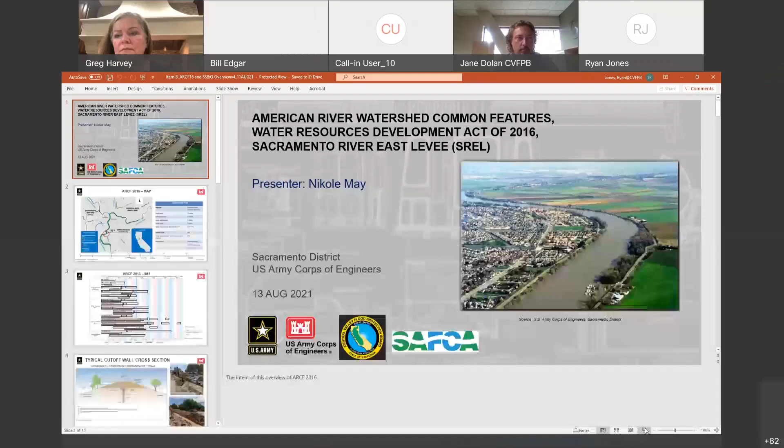Good morning, President Edgar and members of the board. My name is Nikole May. I am a project manager with the Army Corps of Engineers on the American River Common Features 2016 project. Good morning. My area of focus is seepage, stability and overtopping.

Before I move off this slide, just to echo Greg's comments, it really does take a team, and I want to compliment the partnership that has happened between the Corps, yourselves, the Department of Water Resources, and the Sacramento Area Flood Control Agency. We have leveraged everyone's efforts on this massive project to get everything done we've got done so far, and we'll continue to do so, and just appreciate the support of this very important flood risk reduction project.

I'm going to provide a very high-level overview of the overall project, and then a more focused overview of the seepage, stability and overtopping features. So the next slide is a very big picture overview of the project.

What I really want to say here is that the purpose of this project is to address the flood risk associated with the confluence of the Lower American River and the Sacramento River. Both of these rivers have very large watersheds and very high potential runoff, which has overwhelmed the existing system in the past. It's created an unacceptably high level of risk of flooding for approximately 500,000 people, approximately 125,000 structures, and approximately $62 billion worth of damages.

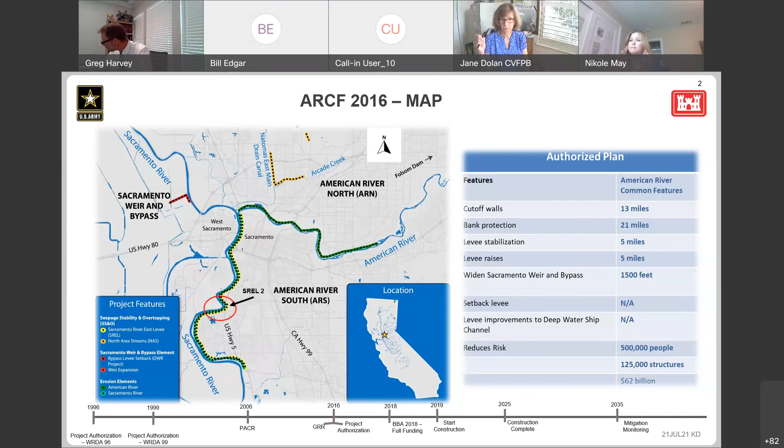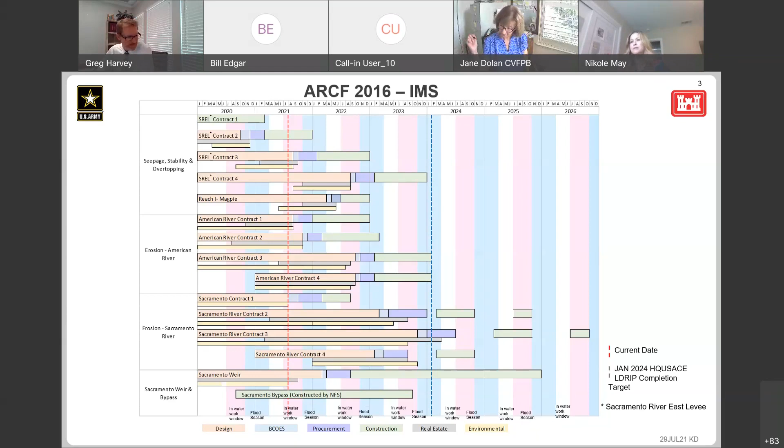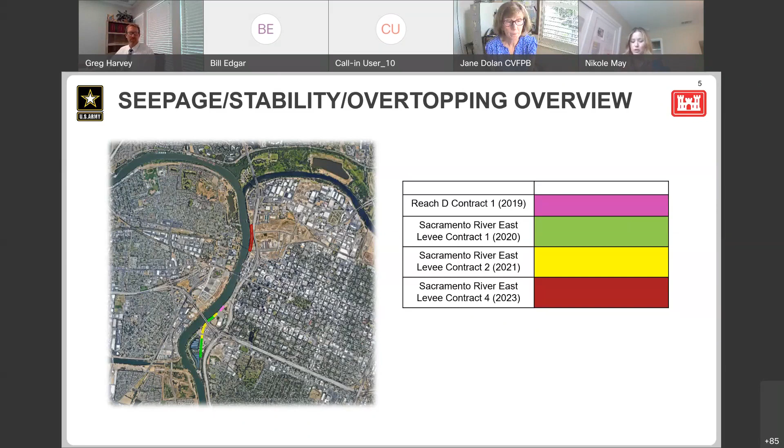The next slide shows approximately 1 mile of improvements, moving a little bit south or downstream. You can see the little pocket there at the bottom of the graphic. There's approximately two-thirds of the mile complete, which you can see in green, and also this year's construction in yellow is already complete and the levee is rebuilt. There's approximately one-third of a mile remaining in 2023, and that will be a cutoff wall as well. The next slide shows you the footprint for the big pocket.

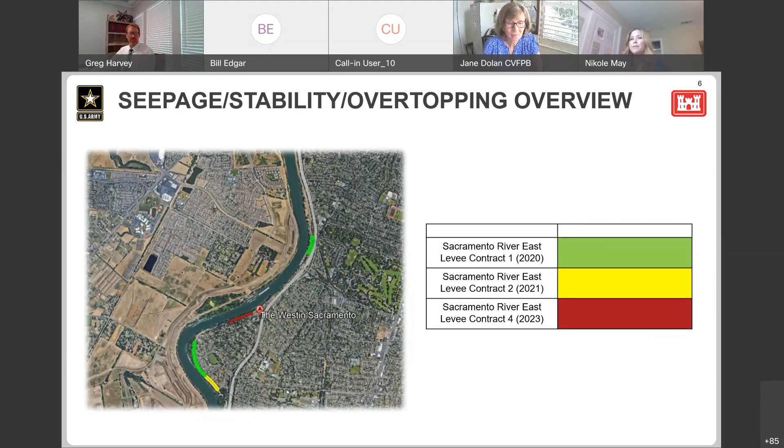The next slide shows just south of the town of Freeport. It includes approximately 1,800 feet of levee raise, approximately 750 feet of cutoff wall, and then we'll be excavating and backfilling with impervious material 2 utility windows that have created gaps. That will all happen in 2023.

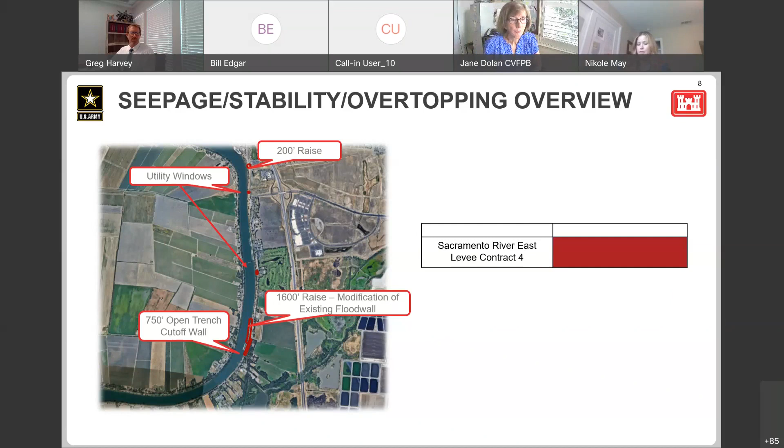And the last slide for this section is Magpie Creek. You can tell the location in the top left corner. You can see the confluence of the rivers down there at the bottom left of that image, and then a blow-up image of what is actually happening here. Just to highlight the major features, there's 2,100 feet of levee raise, approximately 1,000 feet of new levee construction, and a floodgate that will be across Raley Boulevard.

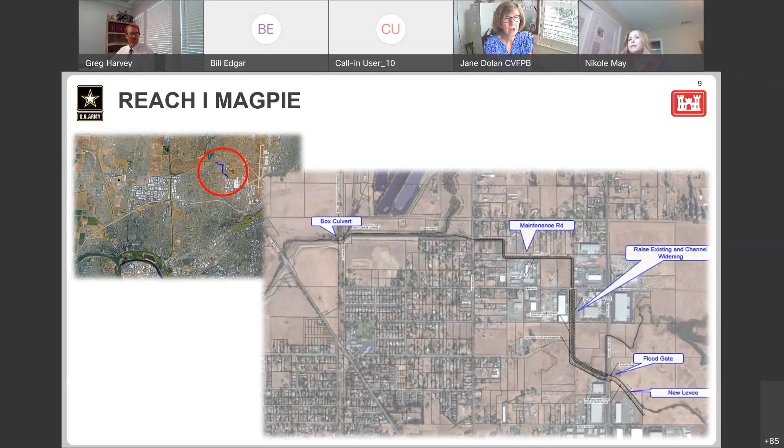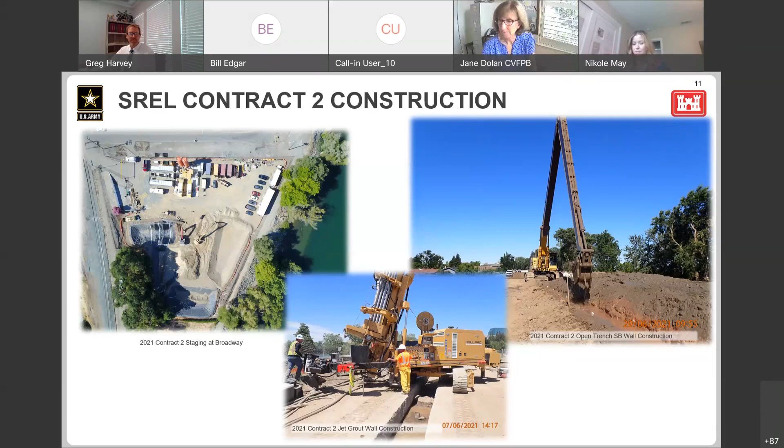So it is quite the piece of equipment. The next slide goes over the impacts.

With major construction, there's inevitably impacts. I'm going to highlight some of those: truck traffic and dirt movement. We have to degrade the portion of the levee, and then rebuild it at the end. There's a lot of truck traffic associated with that work effort, which also causes a lot of dust. It can be at peak times up to 120 trucks per day. That typically happens in the months of March and April for the degrade, and rebuild in August and September.

There's also a lot of vibration and noise associated with these massive pieces of construction equipment. They are very close to residential neighborhoods, and they are reaching depths of 60 to 145 feet. You never know what you're going to hit underground. While we're doing that major construction, it does cause some vibration and noise that is felt and heard by the public.

There are also some recreational impacts. Biking, the levee trails, the levee crest has to be closed to the public during degrade just for safety purposes. Boating and fishing, we've had some impacts at Garcia Bend as well as Miller Park. We had 1 year where the boat ramp at Garcia Bend was closed for the entire season. That was 2020. For 2021 and 2022, we're only closing it periodically when we have those high truck traffic times for the safety of the public.

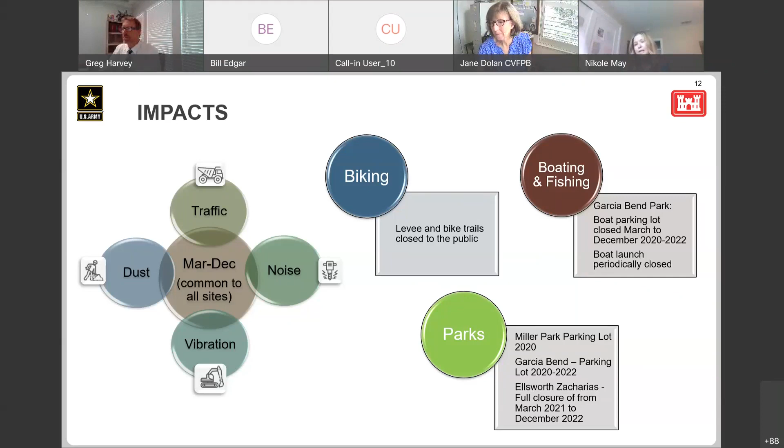And then we have water and air quality monitoring that is required throughout the project. Next slide.

Beach Stone Lakes mitigation is approximately 24.2 acres. It's anticipated to mitigate for all 3 Sacramento River East Levee seepage and stability contracts and a portion, if not all, of contract 4. It's completed and it is flourishing. I went out there a couple of months ago and saw it, and it looks much more full than these pictures represent from last spring.

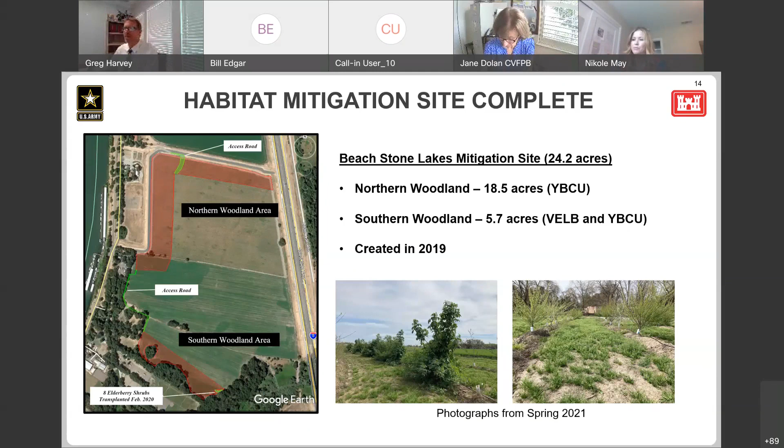Typically, the message to the team is, if there's anything that the public can see, touch, feel, hear, we want them to be able to go to the website and be educated and informed of what is happening before they see, touch, feel, or hear it. So that's been our approach on this project, and really that's all I have, subject to your questions.

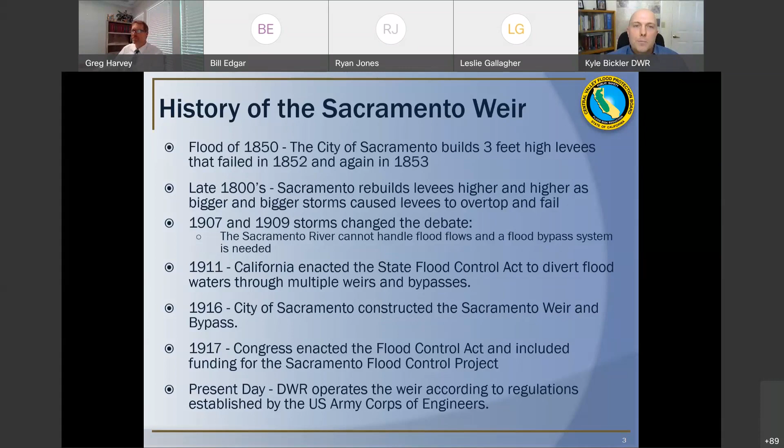Next slide, please. Before handing off the presentation to the Corps and HDR, we want to remind the board of the upcoming action scheduled for August 27th, where the board will be asked to certify the final supplemental EIS-EIR, adopt the statement of findings, the statement of overriding considerations, and the MMRP, and approve the Sacramento Weir project and fish passage. Now I'd like to introduce Sean McNeil with the Army Corps. Ryan, would you please load Sean's presentation? Thank you.

Good morning everyone, this is Sean McNeil. I'm the Senior Project Manager with the Corps of Engineers for the Sacramento Weir Widening Project. It's a pleasure to speak to you today on behalf of the team. We're honored and privileged to work on this project. We're a very diverse design team with over 100 people on the design and review of this. We work with the Central Valley Flood Protection Board, DWR, and SAFCA very closely to execute this project.

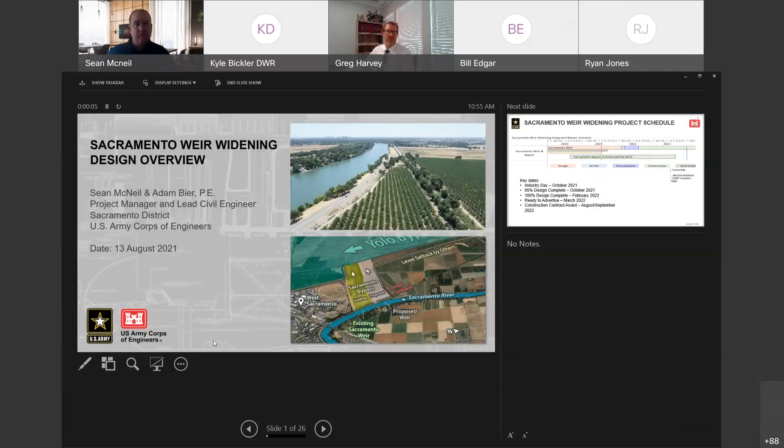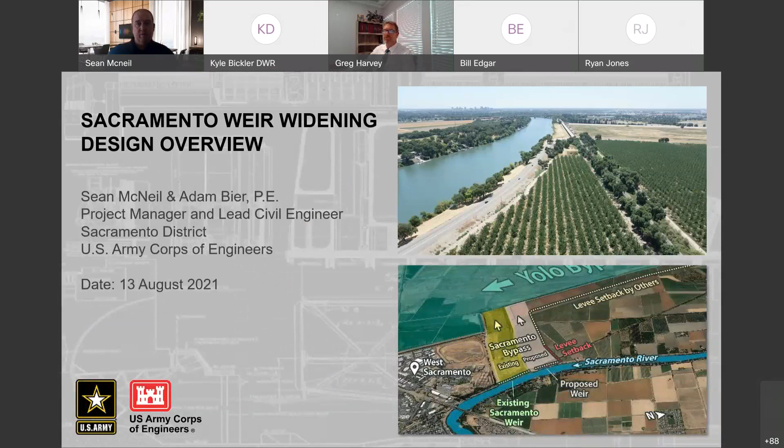We are on a quick pace because we were fully funded and it's an emergency project. Once we get to the next slide, I'll show you the schedule that we're currently on. Barring any unforeseen conditions, next slide Ryan, we plan to be in construction, awarding our construction contract in August, September.

So you can see the key dates below. We're going to offer an industry day this October that will assist contractors who may bid on this to understand the project so they can plan appropriately for when we put this on the street, on the ready to advertise date around March of 2022. But we'll conclude our design by February of 2022.

Unless there's any questions, I'm going to hand this over to our tech lead to better show you the Sacramento Weir Widening Project. Adam Bier, I'm going to hand it off to you. Thanks.

Thanks, Sean. Good morning, and thank you for the opportunity to provide a briefing on the Sacramento Weir Widening Project today. My name is Adam Bier, and I'm one of the engineering technical leads for the Army Corps of Engineers for this project. Next slide, please.

The Sacramento Weir Widening Project is located along the Sacramento River, just north of the existing Sacramento Weir, which, as Kyle showed earlier, was constructed in 1916. The project will be along the right bank of the Sacramento River, looking downstream, or the western bank of the river. The project site construction access will be from the north, about 8 miles north of the project, near Old River Road and Interstate 5.

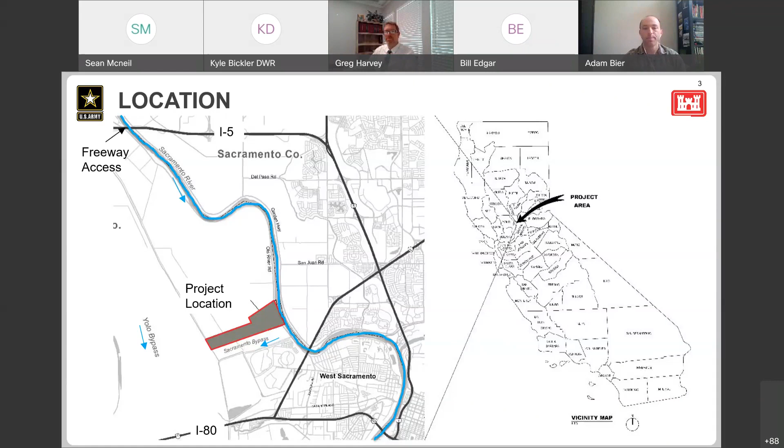And the bypass will be widened approximately 1,500 feet. Next slide, please.

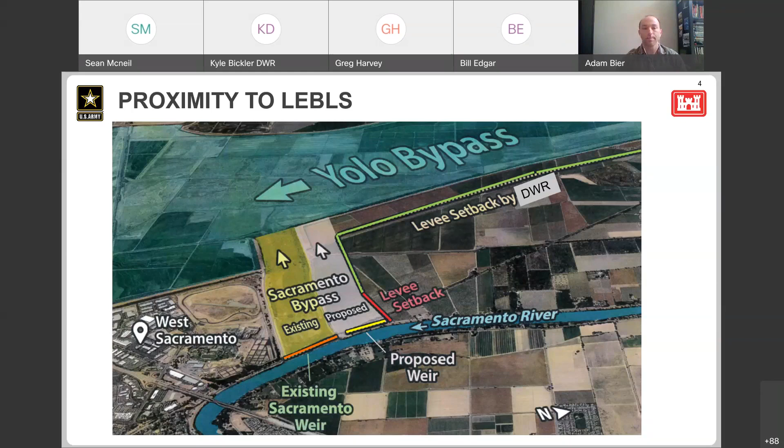This image shows some of the project features, going from the Sacramento River at the bottom of the screen towards the Yolo Bypass at the top. I wanted to highlight some of the project features this morning. The primary flood control feature is the weir. There will be a road bridge for Old River Road that will span the bypass and go over the weir. The road bridge is approximately 1,800 feet long, and the weir is approximately 1,500 feet long.

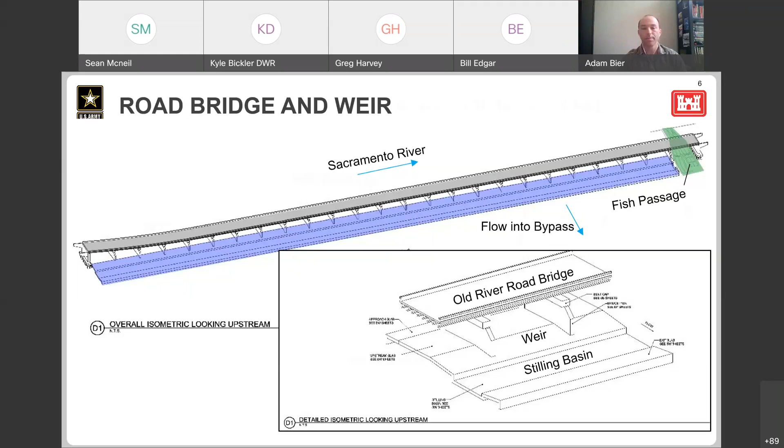One thing I wanted to note is that the project will be maintaining access on Old River Road throughout construction for the project site. As Nicole noted earlier with the seepage and stability project, this project is also anticipated to have heavy truck traffic on Old River Road coming from the north and I-5. The project includes approximately 1 mile of new paved road along County Road 126 and Old River Road, including the new road bridge.

With that, is it time for questions, or do we want to go on to the fish passage first and then come back on questions?

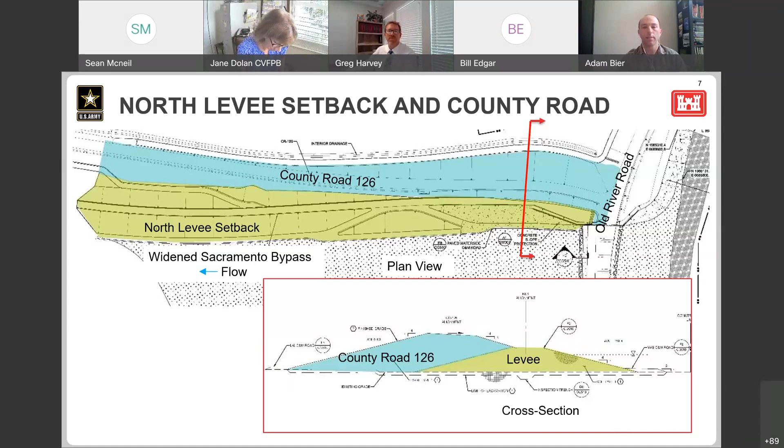All right, well, thank you. And if you have any questions, I can entertain them later. With that, I'll hand it over to Matt Prosif and Gabe Kopp from HDR, who will go over the fish passage feature in detail. Thank you. Thanks, Adam.

Hello, my name is Gabriel Kopp. I'm a senior fisheries biologist with HDR. I wanted to thank President Edgar and members of the board for the opportunity to talk about HDR's role in supporting the Army Corps, DWR, and SAFCA in the Sacramento Weir widening fish passage design project. I'll start with the biology side of things, and then Matt Prosif will present on the structure. Next slide, please.

So we're talking about a floodway project. Why is there fish passage involved in this project? It's a completely fair question.

Previously, with the existing Sacramento weir for the overall flood project, there was stranding that occurred after the floodway of the old Sac weir - not the new one we're building, but the old one. As it began to drain, fish would strand, and that would happen fairly regularly. Biologists would go out as the water receded and pick up as many fish as they could, but obviously there was a great deal of stress, and there was also loss. We had notable mortality events sufficient enough that the National Marine Fisheries Service, NMFS, stated in their regulatory document.

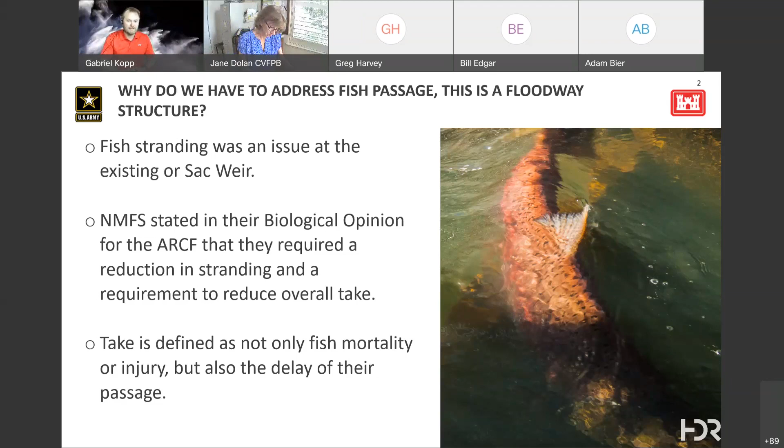The biological opinion for ARCF stated that they would require a reduction in the amount of stranding that occurred and to reduce overall take. Take is defined as not only fish mortality, but injury and even delaying their ability to pass through the waters of the river during these flood conditions. Next slide, please.

So we need these flood projects. Obviously, we have had a history in California when we don't protect our cities, our homes, and our communities, we've seen flooding. Many of us can go back a decade, two decades, or even a hundred years, and look at images of flooding, and really we don't want to repeat those.

So we protect our cities with levees, we straighten the rivers, and in doing so they become less like a natural river. We've learned through time to find that balance better. We can both protect our cities and protect our natural resources, and really restore those riverways into environments that are safer for our cities and safer for our fish, provide them with access and passage, and ensure that we're not having water expand so much that it's creating damage as well. We're finding the balance better.

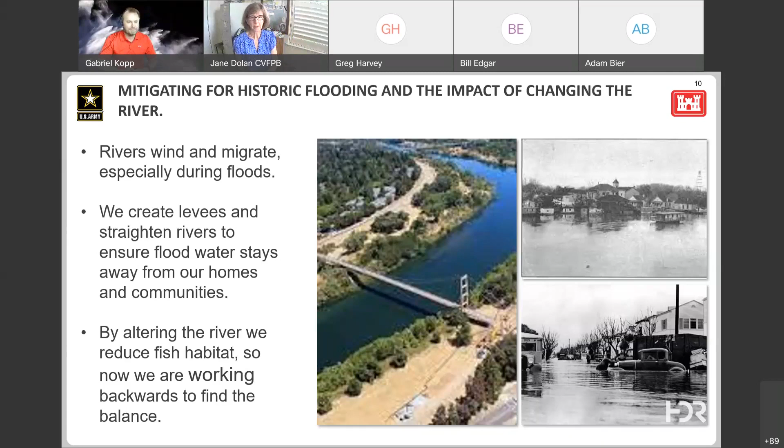So now that we have the idea that we need to have fish passage, and it's part of our floodway project, a regulatory part of our floodway project, what fish are we looking at? Well, the Endangered Species Act drives what fish we are focusing on, because those are fish in fewer numbers. So there are two species currently listed that we're focusing on: specific runs of Chinook salmon, the spring and winter run, and also green sturgeon.

Now, green sturgeon is a very archaic species. It's not evolved very much. You might call it a modern-day dinosaur. It's a fish we don't know as much about as we do, say, a salmon or a steelhead. It's one that you may not even recognize as much. And so there aren't that many projects that actually pass green sturgeon. In fact, there are very few.

To that end, we have really good criteria, state and federally approved criteria, for how we pass salmon and steelhead and other species, but we don't have criteria specific to green sturgeon. Next slide, please. Don't have those guiding documents.

What do we do? Well, we brought in a suite of experts: experts in the biology of sturgeon, experts in fisheries passage, our regulatory experts, and our client experts, so that we could discuss in a collaborative fashion. It took us about 35 formal meetings, among many other breakout sessions, including participants from the Army Corps, the Department of Water Resources, SAFCA, NMFS, the CVFPB, the California Department of Fish and Wildlife, and many others, to establish an agreed-upon approach for how we were going to create a structure that provides the best potential environment, based on what we know, to pass both salmon and green sturgeon.

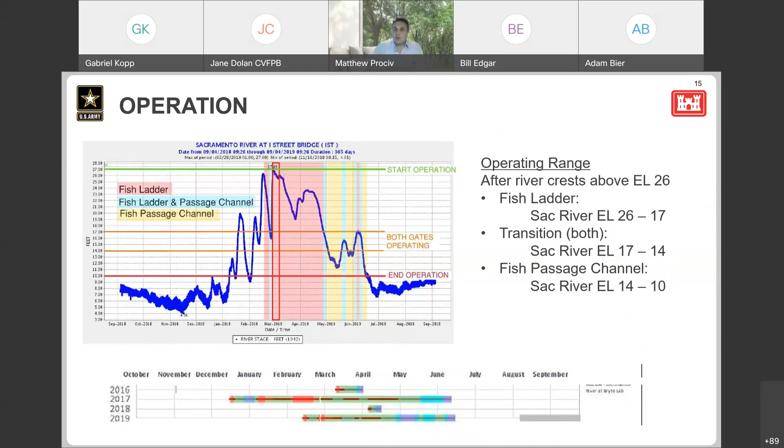As I mentioned, operation of the fish passage facilities will begin after the river crests above elevation 26. Once the water in the river recedes down to elevation 26, the widened weir stops spilling water. The bypass is still full of water and is starting to drain out into the Yolo. That's when we open our operation gate, our flow control gate for the fish ladder, and begin operating the fish ladder. We'll continue to operate that down to elevation 17.

Now, as you can see, the river elevation doesn't follow a regular linear path. Occasionally, following a storm event, we'll get subsequent storms that provide more water to the river. As time passes, we get another storm event and the river level might rise again before falling. We might get several of those peak smaller storm events or releases of water that cause our fish passage to potentially move back and forth between different modes of operation.

So you can see, after operating the fish ladder, as the water falls in the river, we move into that transition zone for a short period and then begin operating the fish passage channel between river elevation 14 and 10. But instead of falling, as you can see on that hydrograph from 2019, we get another storm event that raises our water surface elevation, so we move back into transition with both channels operating. There's even a spike towards the end, right before we stop operation, where you can get into just the fish ladder operating by itself.

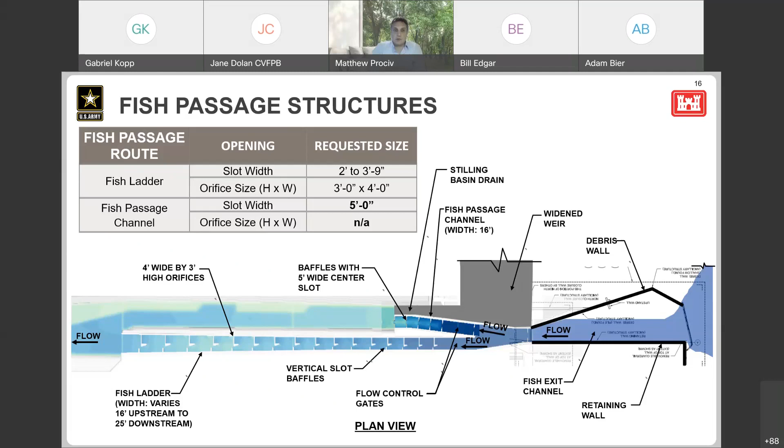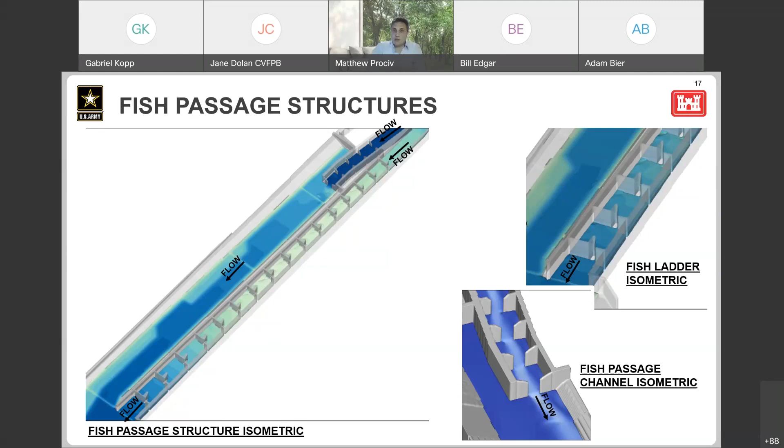Prior to water entering the fish ladder and the fish passage channel, the main part of the fish passage channel, we have 2 flow control gates. These gates are 16-foot wide and about 8 feet tall, give or take, depending on the hydraulic head that we have to hold back. These gates are open and close only.

So when we want to operate the fish ladder, the gate will open fully, and then when we're done operating, it closes fully. We do not throttle the flow or control the flow with these gates at all. These gates are quite large, so it requires 2 stems to operate and has an actuator up above.

The fish ladder is higher in elevation, and so that gate, when it comes out of the water, sticks up above the wall. So we had to place the actuator on a platform up above, with a maintenance platform around that actuator and a stairway up to reach that. The lower fish passage channel gate is located lower in the channel, so when it's fully out of the water, it's still below the top of the wall. So we're able to put that actuator platform and maintenance access platform right at the top of the wall, with just a walkway from our access road out to that gate.

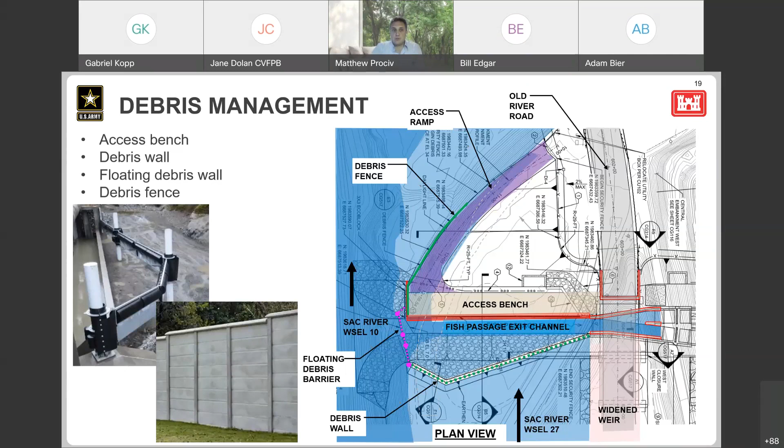We're making some modifications to the existing stilling basin as part of the project. Currently, the existing stilling basin for the existing weir is separated into 6 separate areas that are isolated from each other by guide vanes that extend far downstream of the weir. What this ends up doing is, following a spill event over the weir, water in the bypass recedes, and the water in the stilling basin has no way to get out, creating a pool. Fish that aren't lucky enough to get out of that pool and move downstream become stranded, similar to what Gabe was mentioning before.

So in order to provide those fish an exit and reduce the stranding risk on the existing weir, we will be cutting 5 openings, one in each of the 5 guide vanes. The openings will be 7 feet high by 8 feet wide, which will accommodate both the movement of water and fish out of these pools, as well as allow maintenance personnel to drive a small excavator up through the channel to more easily clean debris and sediment out.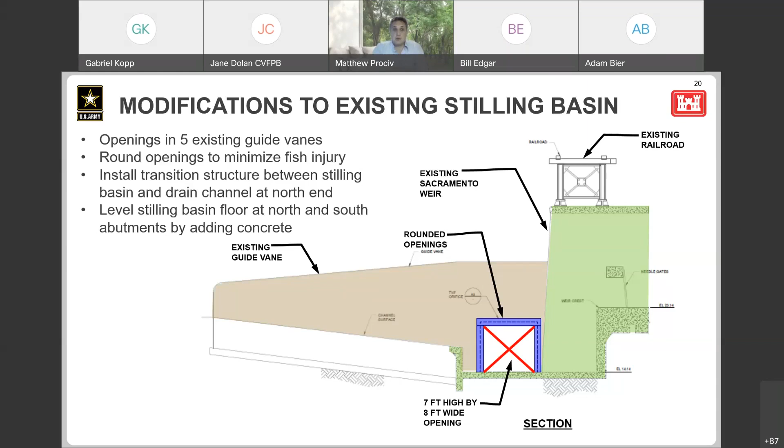The water coming through the transition structure out of the existing stilling basin enters what we call the existing stilling basin drain channel. It's essentially a trapezoidal channel, 10 feet wide at the base, with 3 to 1 side slopes. The bottom of the channel will have grouted rock slope protection, which will protect against erosive forces from the velocity of water coming down, as well as allow maintenance personnel to drive small wheeled equipment up into the stilling basin to help clean it out. The sides of the channel will also have rock slope protection to protect against erosive forces.

The existing stilling basin drain channel will also have to cross our access road that runs adjacent to the bypass transport channel, and that will be done through what's referred to as an Arizona crossing, essentially a dip in the access road matching the channel shape. This allows, during dry periods, for personnel to drive across the existing stilling basin drain channel and access the rest of the bypass transport channel downstream, while still letting water pass straight into the bypass transport channel when that drain channel is running water.

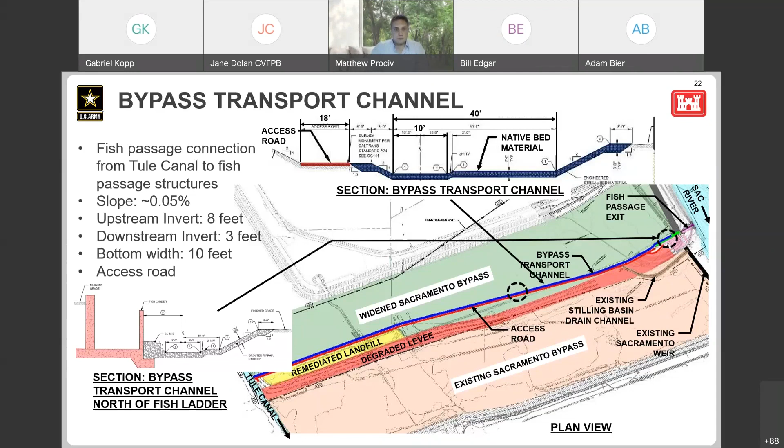Here at the downstream end of the bypass transport channel, we have our connection to Tule Canal. As I mentioned at the beginning, the entire fish passage facility is here to allow fish to move from Tule Canal, the Yolo bypass, following a flood, up and back out into the Sacramento River. So the hydraulic connection to Tule here, we're at a bottom elevation of 3, and then we just drop down a couple of feet to elevation of 1, where we connect into Tule Canal.

The access road here, when it hits Tule Canal, stops short, and we have a hammerhead turnaround for access. That's at elevation 12, so about 9 feet higher than the bottom of our channel at this point.

And then the bypass transport channel also picks up the cross drainage from the bypass. There are 2 major cross drainages coming in. They're currently part of the Levees project that's underway, and as part of this project, we will tie those cross drainages into this bypass transport channel.

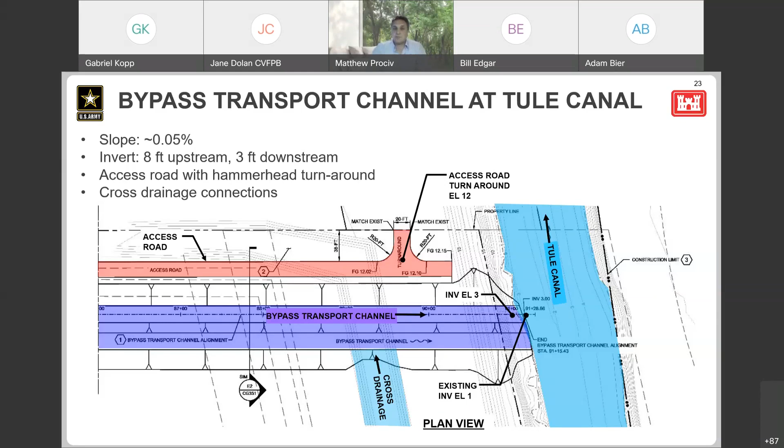One of the things it also allows us to do is get a fairly tight estimate of the flow coming down the fish passage channel. At the low end, we're probably down around 70 cubic feet per second, and at the high end, probably up closer to about 270 cubic feet per second.

That modeling is still underway. It's being finalized, and that'll be wrapping up here. We'll discuss that more in the next steps. Next, please.

I'll hand this back to Gabe for this slide, and then I'll come back and wrap up.

Thanks, Matt. So as you can see, there's a lot that goes into designing these structures, especially when you consider a floodway, a 16-foot wall of water that we have to be able to manage while still letting fish pass. With all of the expertise, technical knowledge, and investment of time, we want to make sure this works right. That includes monitoring to see how the fish respond, and maintaining the overall facility, so you have your operations, maintenance, and monitoring.

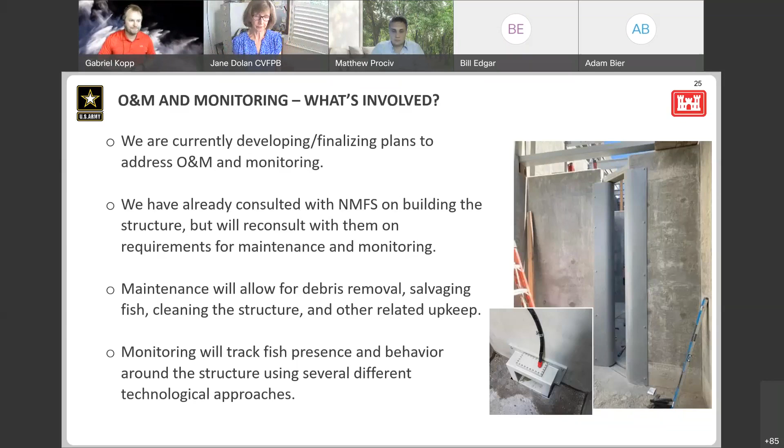Now, these plans are in development, so that is a broad brushstroke. They may change, they may become more, they may become less. But overall, that's kind of a bookend on where we're at with those in-progress items. Next slide, please.

Thanks, Gabe. So for next steps, as I mentioned, we're working on the computational fluid dynamic modeling of the fish passage, wrapping that up. We just have a few more model runs to do, and that will be wrapped up into a technical memorandum that will go into the design documents. We'll also be completing the 95% and 100% design drawing specs and documentation, and moving those forward to bid documents, as Sean and Adam were talking about at the beginning.

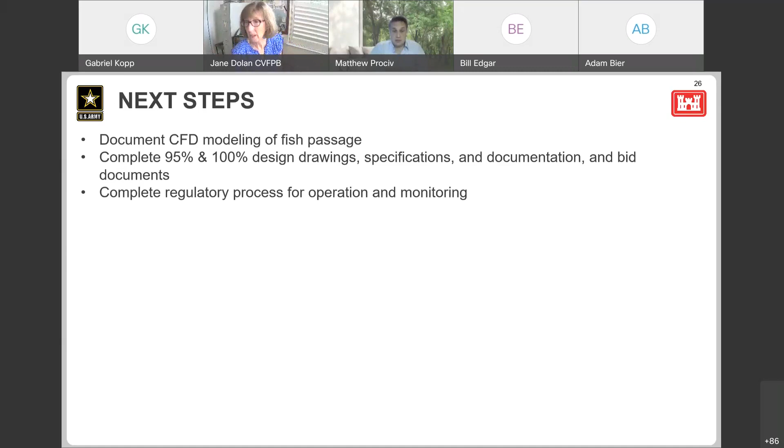And then, as Gabe was just mentioning, we're working through the regulatory process for setting up the operation and monitoring plan going forward and the details of that. So that is underway and will continue. With that, thank you for your time. And that's all I have.

Thank you. That was very in-depth. That was great. Sean, Adam, and then Gabe and Matt. That was really helpful. So I don't know if you would do questions now before we take a quick break. Probably better. Let's take the questions, Greg, and then go to break, please. Okay. Vice President Dolan, you have a question?

I do. Can you hear me? Yes. I have three. Do I understand that the modeling was computational and there was not a physical model that was created? Is that correct? Yes, that's correct.

Okay. In all of your analysis, and I know when you have a big group like that, you have a whole lot of opinions and suggestions, and developing it is a very complex job to do. Did you find that there's any other place? I know Sacramento River is not like any other place, but did you find some other place where some facility like this was operational? I know fish ladders are, but this one's pretty long.

Sure, I can speak to that. Our fisheries program is a national program, and we do work up in the Columbia River. There, they are passing sturgeon, albeit at rates that may not be necessarily optimal. So we have examples of projects where we're starting to learn what works and what doesn't, but we don't have a gold shining star. There are other projects where the facilities and layouts are very dissimilar to the size and complication of ours. We did a robust investigation, using our own institutional knowledge among engineers and biologists, along with all the experts, to look at as many of those as possible and make appropriate apples-to-apples comparisons.

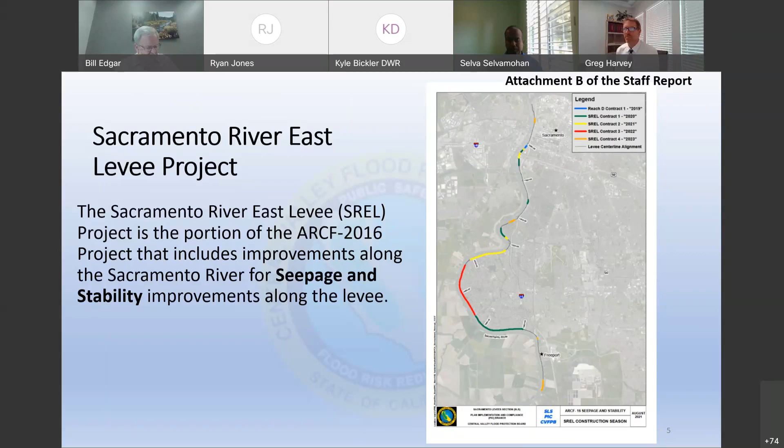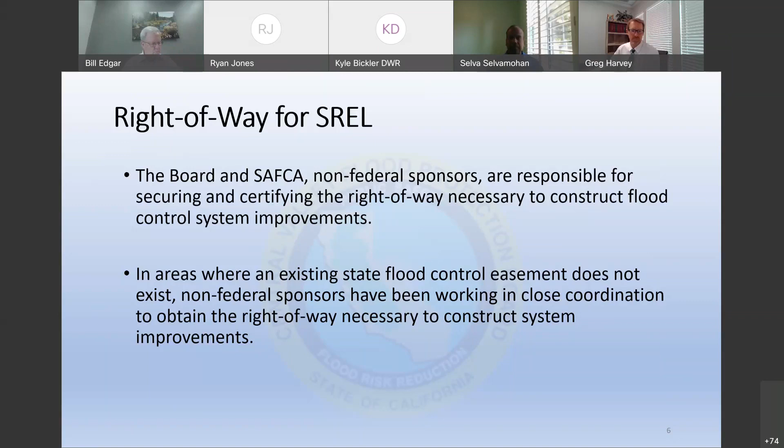The board and SAFCA, collectively known as non-federal sponsors, are responsible for securing and certifying the right-of-way necessary to construct the flood control system improvements. In areas where an existing state flood control easement does not exist, non-federal sponsors have been working in close coordination to obtain the right-of-way necessary to construct the system improvements. Next slide, Ryan. So what is ERIP?

As you can imagine, several privately owned encroachments have been constructed within the existing flood control easement along the Sac River East Levee footprint. So SAFCA has developed a program known as the Encroachment Removal Incentive Program, in short ERIP, to facilitate the timely removal of encroachments directly affected by construction within the SREL seepage stability footprint, to avoid unnecessary delays in project implementation. Next slide, Ryan.

Continuing information about the ERIP. The ERIP provides compensation to property owners if they agree to the encroachment removal prior to the start of levee construction. So far, they've gone through 2 years of construction, and the ERIP has been generally well received by homeowners.

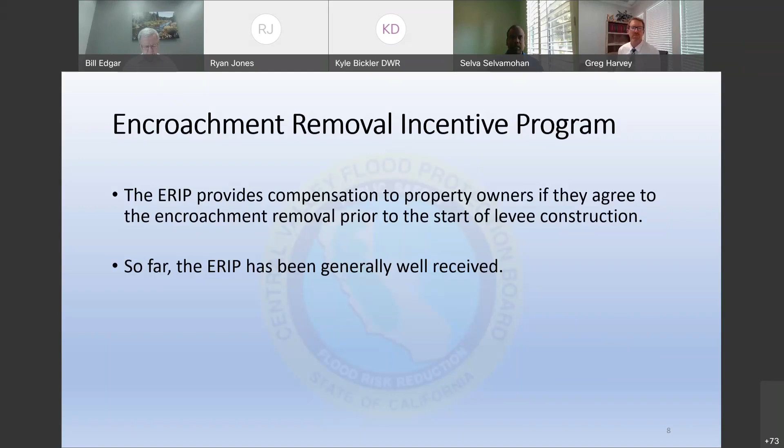As indicated before, the ERIP is a voluntary program. If a property owner does not enter into an ERIP with SAFCA, it would be left to the Central Valley Flood Protection Board to address the encroachments. Board staff received a few cases from SAFCA as part of the 2021 construction effort, which I'll cover in my next presentation.

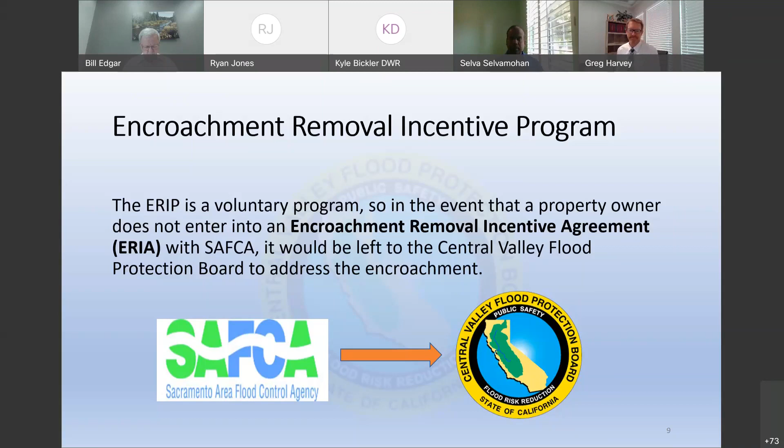Here is another view of the ERIP implementation status. The table on the left shows the number of signed ERIPs and anticipated ERIPs to be executed in upcoming years. The same information is shown in the pie chart on the right, showing the percentage of ERIAs in terms of the overall SREL project. As you can see, the majority of encroachments fall under the 2022 construction zone, in the big pocket area.

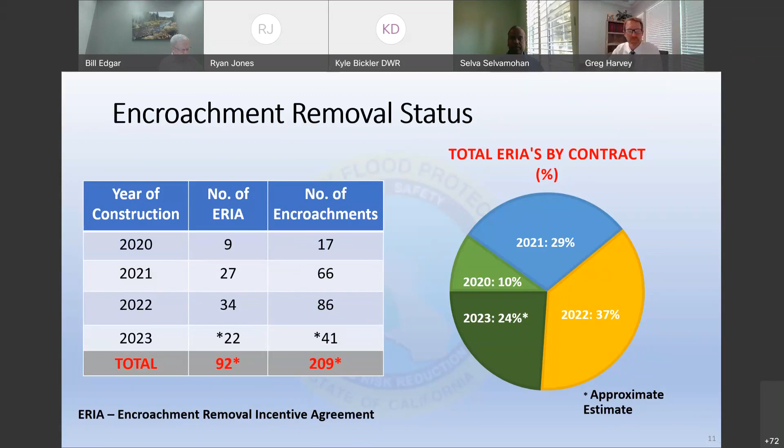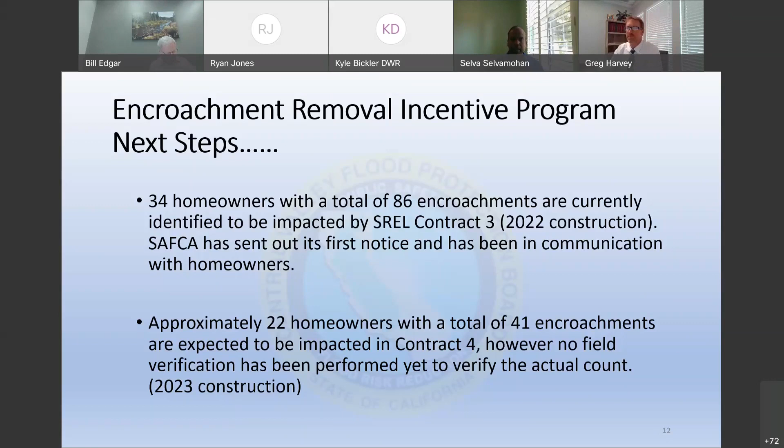This slide summarizes next steps in the ERIP program supporting the next phases of construction. A total of 34 homeowners with 86 encroachments are currently identified to be impacted by next year's construction. SAFCA has sent notices and been communicating with homeowners. Approximately 22 homeowners with 41 encroachments are expected to be impacted in contract 4, the last year of construction 2023, but these numbers will be verified once design reaches 90%. Board staff will work closely with SAFCA to address these encroachments so they're removed timely without delay to Army Corps construction.

That concludes 4D, moving to... okay, this is agenda item 4E. Again, Selva Selvamohan, Chief of the Levee Section, Board Staff. In this presentation I'll briefly go over the Sacramento River East Levee construction impacted encroachments, and Dennis Bartolome, Board Staff, will present the existing access point survey done by Board Staff in the MA9 area.

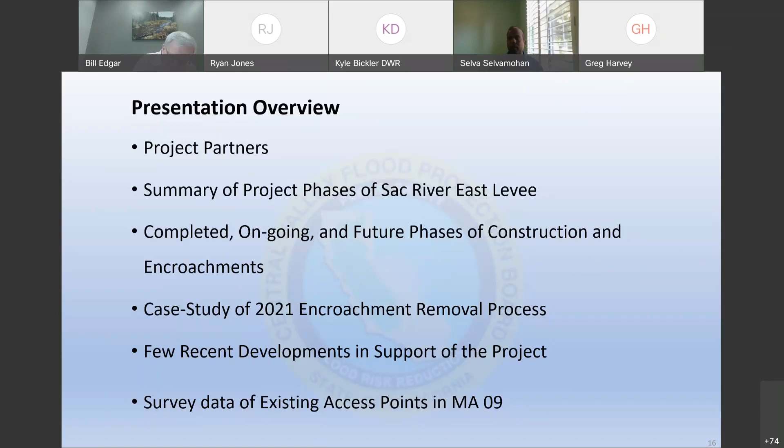The purpose of this slide is to show an overall SREL construction and different contract phases. The map on the left shows an overall construction map with some landmarks. At the top, Pioneer Bridge is shown, with small pocket and big pockets also highlighted for reference. The map on the right shows a zoomed-in version of levee segments from small pocket to north, showing different colored levee segments. In the next few slides, I'll walk you through each contract phase and impacted encroachments in those phases.

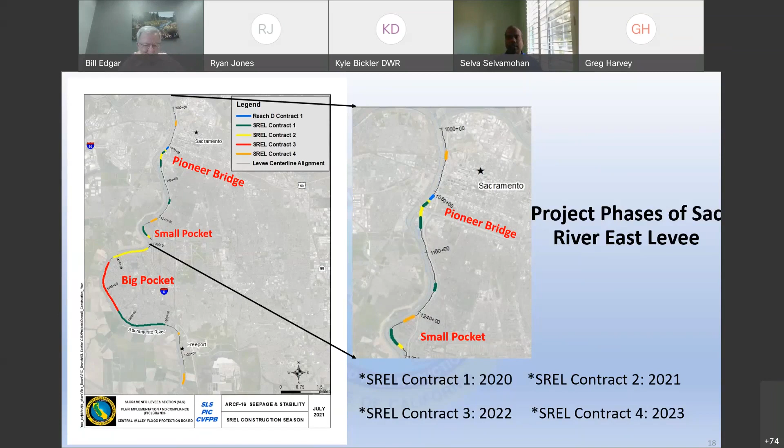What you are seeing in this slide is a few examples of removed encroachments in 2020. Concrete stairs and wooden stairs are the primary ones there.

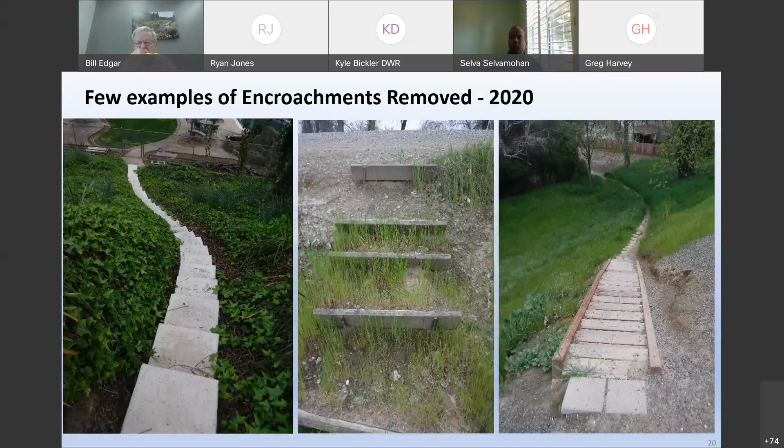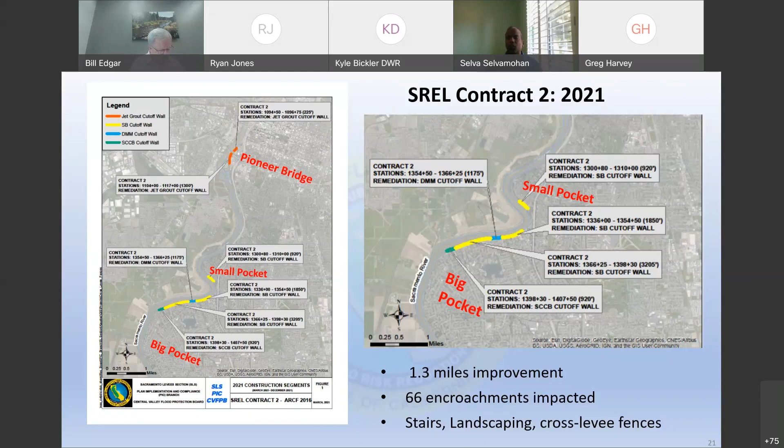What you are seeing in this slide is a few examples of removed encroachments in support of 2021 construction. The image on the left shows wooden stairs, and the image on the right shows a cross-levee fence.

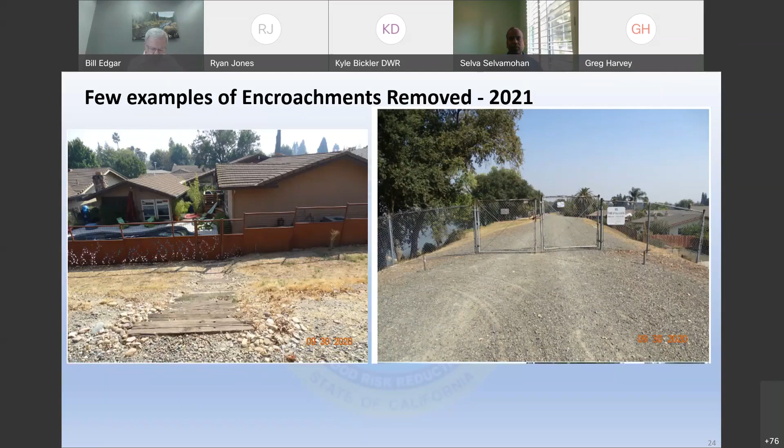This is the upcoming construction for next year, 2022. The slide shows the segments planned under the 2022 design. The map in the center shows the levee segment circled in orange, in the big pocket area, that is being designed under this contract. In this contract, approximately 2 miles of cutoff wall will be constructed.

This is where the majority of encroachments were identified. A total of 111 encroachments were identified to interfere with this contract, and board staff and SAFCA are closely coordinating to address those encroachments prior to construction beginning in 2022. The impacted encroachments include stairs, landscaping, retaining walls, and a few cross-levee fences.

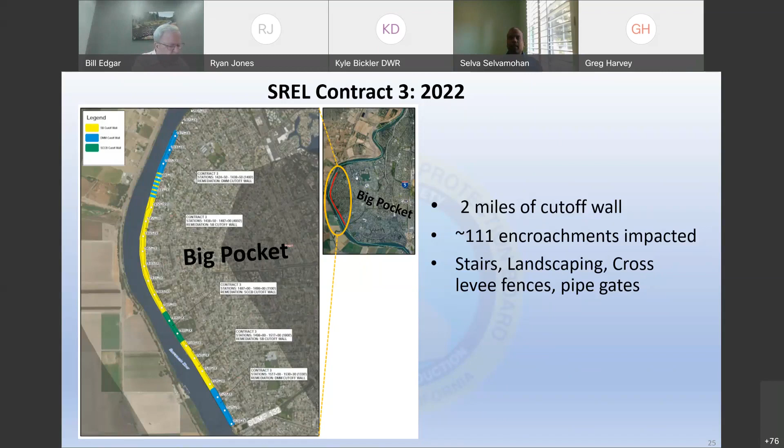This is the last construction zone shown here, 2023. This is again a contract that will be completed in 2023, and approximately 1.2 miles of levee improvement is being planned and designed. Under this contract, approximately 40 encroachments belonging to about 22 homeowners are expected to interfere with the construction footprint. These numbers are estimates only, and we will revise them once the design reaches the 90% stage. Primary encroachments include stairs and landscaping.

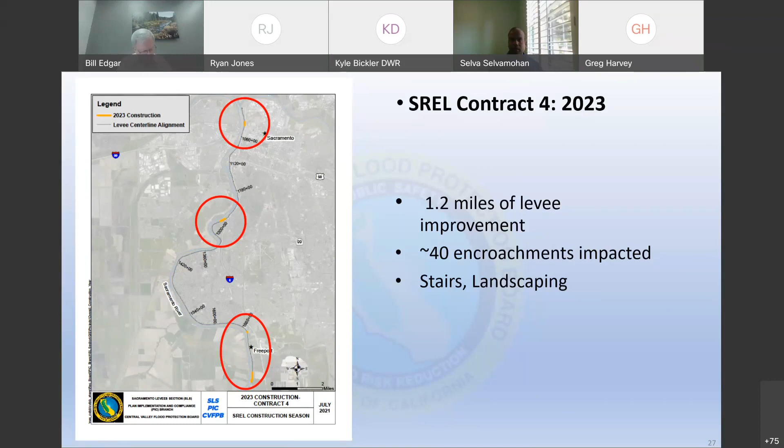Here's the summary of overall encroachment removal status for the entire SREL project. For 2020, a total of 17 encroachments were removed. For 2021, a total of 66 encroachments were removed. Next year, a total of 111 will have to be removed. And finally, in 2023, about 41 encroachments will have to be addressed.

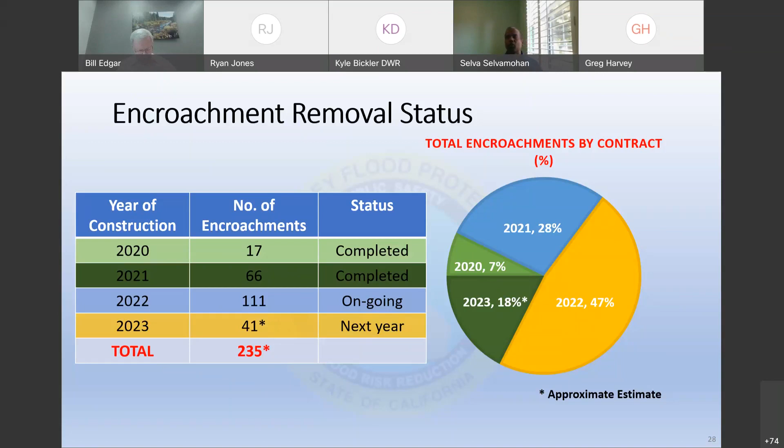The pie chart on the right shows the percentage of impacted encroachments in relation to the overall SREL project. As you can see, the majority of the impacted encroachments are in next year's construction zone around the Big Pocket area, about 47%. Next slide, Ryan.

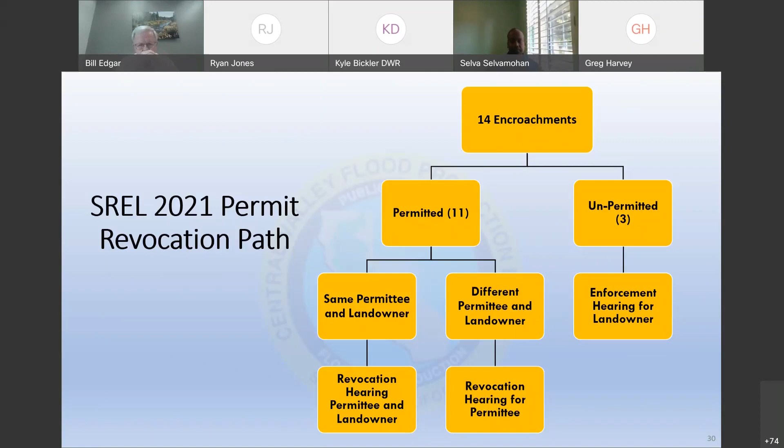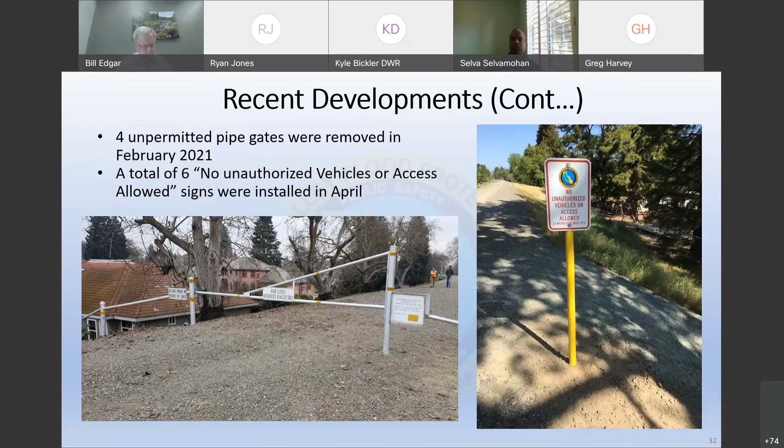Next slide, Ryan. This is another recent update. 4 unpermitted pipe gates that were identified to interfere with the SREL construction were removed this spring by MA9 in coordination with board staff. Following the removal, board staff coordinated with MA9 to install 'no unauthorized vehicle or access allowed' signs to deter unauthorized vehicle access to the levee. The image on the left shows one of the removed gates, and the image on the right shows the installed sign. Next slide, Ryan.

Dennis. Thanks, Selva, for the quick rundown. Hello, President Edgar, members of the board. My name is Dennis Bartolome, board staff of the Sacramento Levee section. I'll now give an overview of the survey of the access point map in Maintenance Area 9, known as MA09. Let me now go ahead and share my screen to show the actual map.

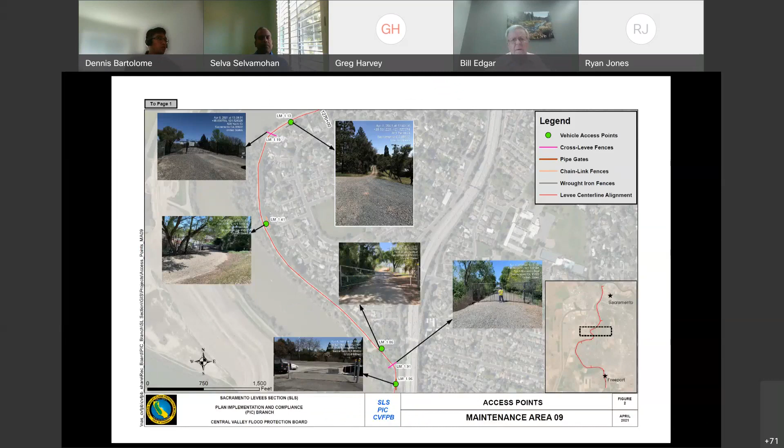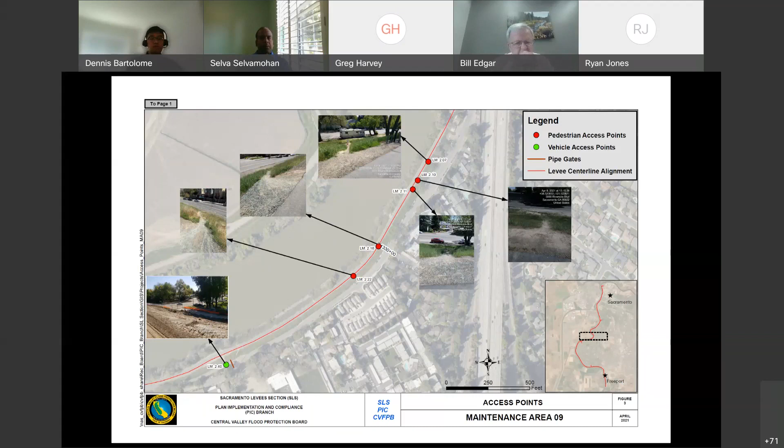Let me go back to the main map to show everyone where we are now. We just finished section 4, and now we are at the middle of Big Pocket at section 5.

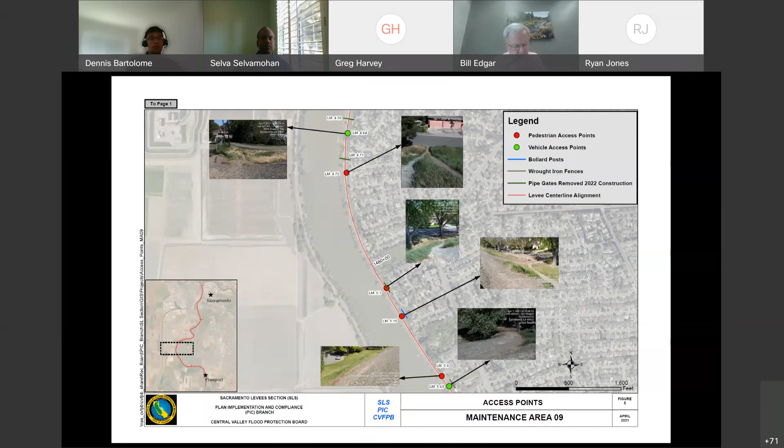A few more pedestrian access points in this section. Most of these access points are accessed from a residential area, and there are also a couple of vehicle access points at the top and bottom of the map.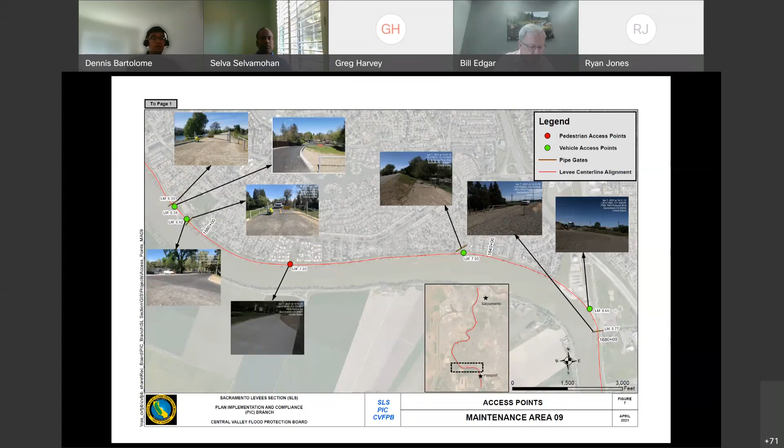Just south of Big Pocket, next to I-5 freeway, located in the vicinity of Freeport Marina, are 4 vehicle access points and a couple pedestrian access points with stairs on the landside slope of the levee. The vehicle access points in this section are also closed off with gates.

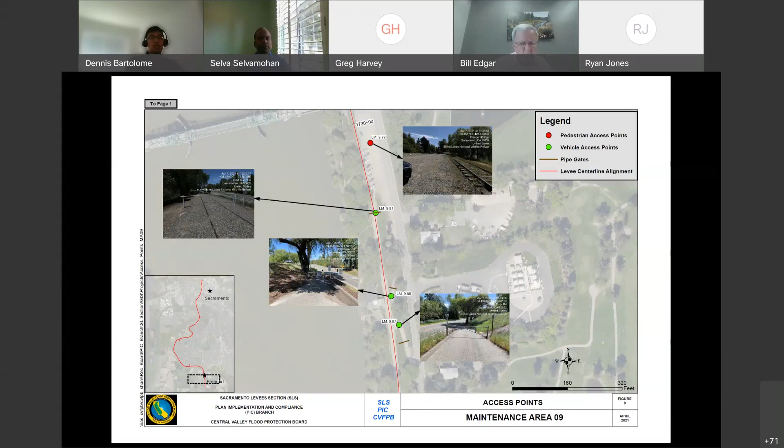In this section, there are 3 vehicle access points with pipe gates installed at the entrance and a pedestrian access point just south of Freeport Bridge.

Now here we're at the last section. There's a couple more vehicle access points, located just next to Cliffs Marina. That's about it for the access points in Maintenance Area 9.

It took us about a couple days to gather all these data points, and we actually started at this section here and moved our way up to where Sutterville Road and I-5 freeway is.

So with that, I'll stop sharing my screen. I believe this should conclude the presentation for agenda item 4E.

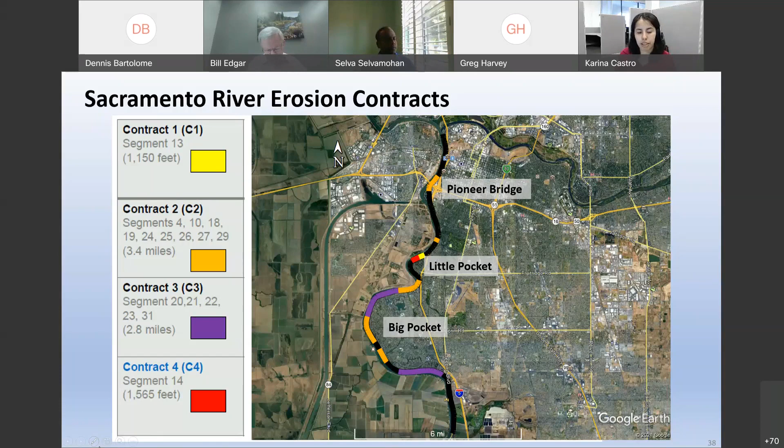Starting with contract 1, it is the smallest of the 4 contracts, covering approximately 1,150 feet of improvements near Scott Seafood, which I have indicated in the image on the right for your reference. The design for contract 1 is 100% complete, and it is scheduled for construction in 2022. No boat docks were identified within contract 1.

Here we have contract 2. It consists of a few separate segments spanning from Pioneer Bridge all the way to the Big Pocket area. It is the largest of the 4 contracts at approximately 3.4 miles. We anticipate that the design for contract 2 will be at 65% by January 2022, and it is scheduled for construction in 2024 and 2025. This is also the contract with the most amount of encroachments identified, with 16 boat docks, as well as a few other miscellaneous encroachments, including items such as stairs, pumps, sprinklers, fences, and utilities.

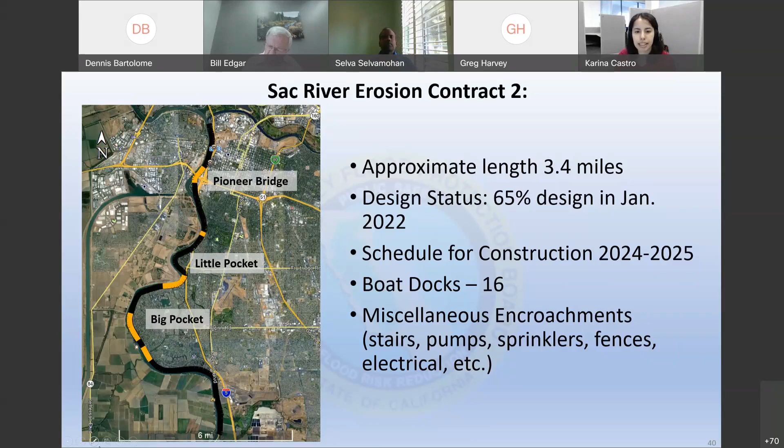Here we have contract 3. It consists of 2 segments located in the Big Pocket area. It is approximately 2.8 miles, and we anticipate that 65% design will be completed by September of 2022, with construction scheduled to occur in 2025 and 2026. Because this is located in a very residential area, there will also be quite a few boat docks identified, with 15 total, as well as a few other miscellaneous encroachments.

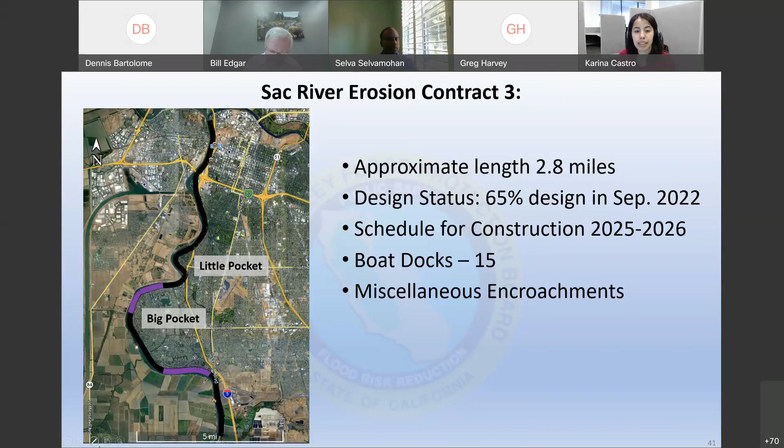Here we have contract 4. It is located just southwest of contract 1, as you can see in the enlarged image. It is just slightly larger than contract 1, covering approximately 1,565 feet. We anticipate that 65% design will be completed by May of 2022, and construction will be scheduled for 2024. Although this is a relatively small portion of the overall project footprint, there were quite a few encroachments, with 11 boat docks identified.

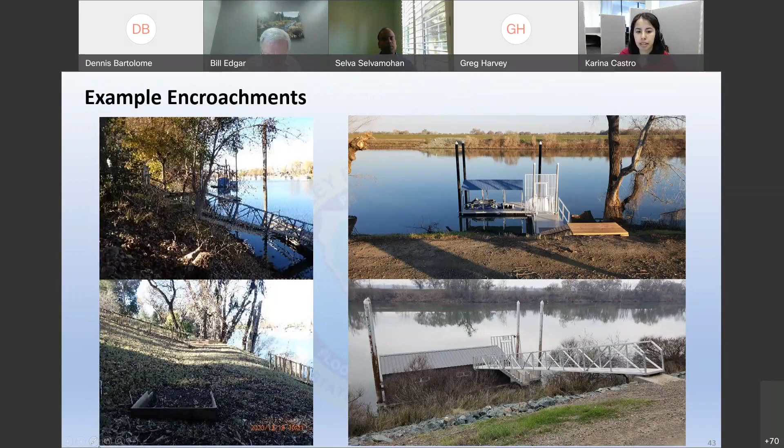Here we have a few example photos of encroachments impacting the Sacramento River erosion work. As you can see, this is mostly boat dock items, but there are a few boat dock related structures such as stairs, ramps, and gangways.

Bringing us back to the American River Common Features 2016 authorized plan, I wanted to look at the authorized erosion work for the American River. ARCF 16 authorized up to 11 miles of erosion improvements along the American River.

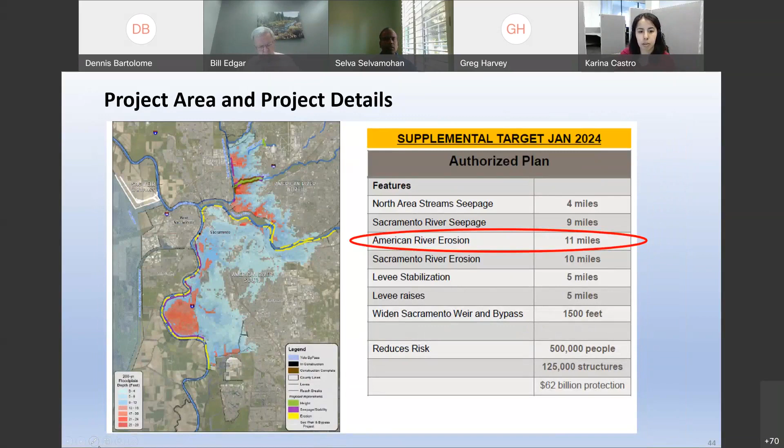Starting with contract 1: it consists of a single segment approximately 1.2 miles long, located just above Sacramento State University. The design for contract 1 is 100% complete, and it is scheduled for construction in 2022.

Here we have contract 2. It is 2 segments, approximately 1.4 miles in total length, located right across the river from contract 1 and Sacramento State University. Design for contract 2 is 95% complete, and it is scheduled for construction in 2022 and 2023.

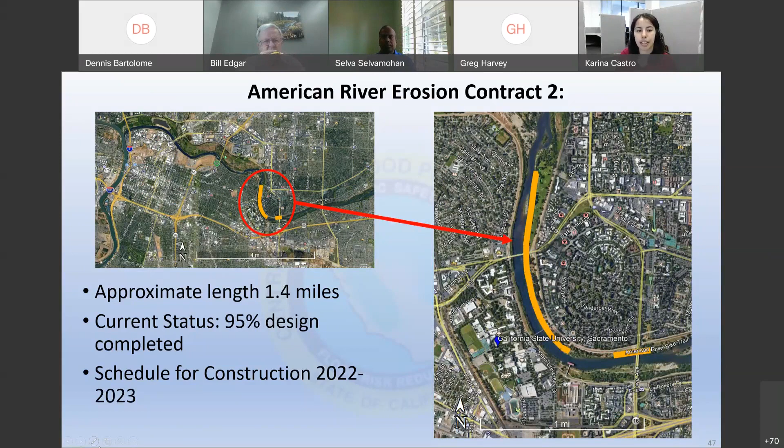Contract 3 consists of 3 segments, totaling approximately 2.8 miles. It is currently at 35% design, and it is scheduled for construction in 2023, wrapping up in early 2024.

Finally, we have contract 4. It consists of 4 segments, totaling approximately 1.4 miles. Design for contract 4 is at 10%, and like contract 3, it is scheduled for construction in 2023, wrapping up in early 2024.

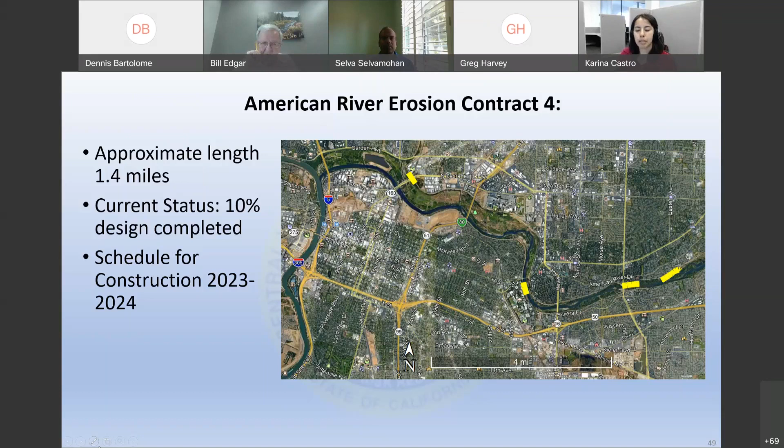That is all I have in terms of updates for the upcoming erosion work. I will now pass it along to Selva, who will provide some information on our coordination efforts with the State Lands Commission as it relates to the erosion work.

Thank you, Karina. Good afternoon again, Board President Edgar and Vice President Dolan. This is Selva Selvamohan, Chief of Sacramento Levee Section, Board staff. In the next few slides, I will present information shared in a recent coordination meeting facilitated by board staff with State Lands Commission staff. As you heard from Karina's presentation, it is obvious that boat docks are the primary encroachments expected to interfere with erosion work.

So in anticipation of future board permit applications for new or replacement boat docks, board staff recently facilitated a coordination meeting with State Lands Commission staff to better understand SLC's jurisdiction and requirements for encroachments within their jurisdiction. We also have a representative from State Lands Commission, Ninette Lee, Public Land Manager, with us today to possibly assist with any clarifying questions.

What you are seeing in this slide is a cartoon of a typical levee cross-section and a boat dock, circled in black on the water side, just for illustration reference. The ordinary high water mark is shown with the red line on the water side. The State Lands Commission has jurisdiction below the ordinary high water mark on the water side, as shown below the levee cross section.

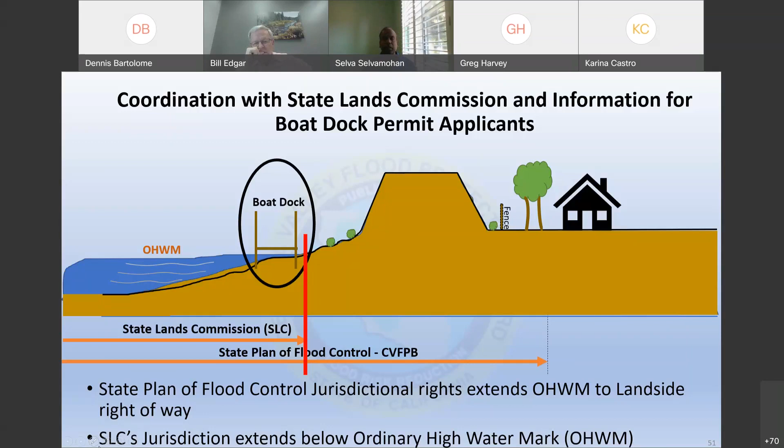The Central Valley Flood Protection Board's State Plan of Flood Control jurisdiction extends from landside right-of-way to landside right-of-way on the other side of the levee system, while the State Lands Commission's jurisdiction runs from the ordinary high water mark on one levee system to the other. As you can see, the boat dock is located within SLC's jurisdiction, and it also has to meet the board's jurisdiction requirements as well.

Because boat docks are located within State Lands Commission's jurisdiction boundaries, permit applicants need to get lease agreements from State Lands Commission to construct any encroachments below the ordinary high water mark. Getting a lease agreement is not a requirement for processing a board permit; however, we encourage applicants to work with SLC to obtain necessary lease agreements.

And it concludes the presentation of agenda item 4F. Now I will turn it over to Greg Harvey, Chief of the Plan Implementation and Compliance Branch, to wrap up the series of these presentations.

Thank you, Selva. Thank you very much for your presentations. Thank you to Nicole May for giving the presentation of the overview and the whole Army Corps team, and Kyle Bickler with the department and the design team he works with, and our Sacramento Levee section staff. I just wanted to highlight all the coordination that has been going on in this project. It's a massive undertaking, and I think this was a great opportunity to give a detailed perception of all the work going on out there for the board.

So with that, President Edgar, if there are questions from the board. Yeah, thanks, Greg. That was very comprehensive and very interesting. Is Nicole May still around? Nicole, are you still on the conference? I am, sir. Oh, thank you.